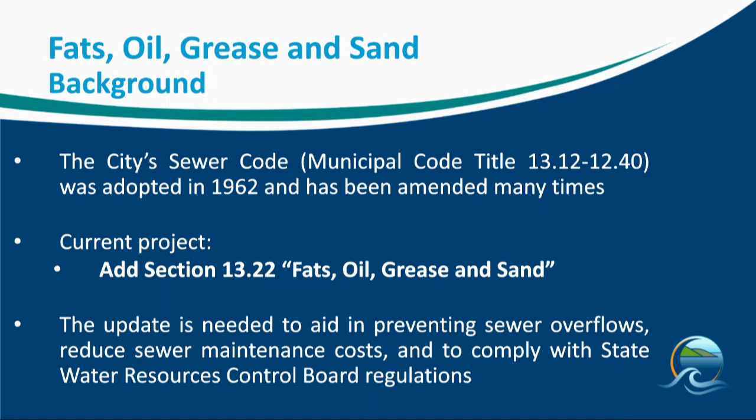Hi, good evening, Madam Mayor, council members. Tonight we have a workshop on fats, oils, grease, and sand, amending the Municipal Code Title 13, Water and Sewer. The city's sewer code was adopted in 1962. It's been amended several times since then. Our current project is to add a section 13.22, fats, oil, grease, and sand. We're proposing this update to help prevent sanitary sewer overflows, to protect public and private property, to reduce sewer system maintenance costs, and to comply with state water board requirements.

So we have an overview of our presentation tonight. We'll be talking about what is FOG, what FOG looks like in the sewer collection system, why we should have a FOG ordinance, who's affected by the FOG ordinance, the prohibitions and regulations of the ordinance, pre-treatment for FOG, and administration of the city's FOG control program.

Can you wait just 1 minute? Our screens, oh, they're fixed. Sorry. Gotcha. Thank you. Okay.

So what is FOG? In the sewer collection system, FOG stands for fats, oils, and grease. And that can come from animal or vegetable sources. It's a long chain carbon and hydrogen molecule. It's a really sticky molecule, and we call them triglycerides. In our sewer collection system, they come in two types. There's the dispersed grease and the floatable grease.

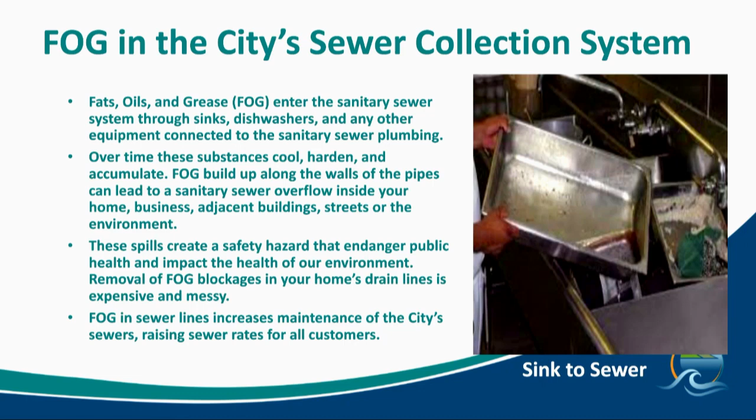So FOG in the collection system can be very expensive. It's very expensive to clean up a sanitary sewer overflow, whether it's on private property or public property. And having FOG in our sewer collection system increases the city's maintenance costs. And those costs get paid through our sewer rates, by our customers.

So what does fog look like in the city's sewer collection system? This center photo here is actually a CCTV photo from one of our pipes. You can see that the fog is collecting along the top of the pipe, because the fats are floating along the top of the effluent. This is kind of the beginning of the problem. It'll start collecting on the pipe, it'll stick to itself, and more and more will collect.

For example, some of this might drop off the pipe and land into the effluent that's flowing. It becomes what we call a fog boat. These globs of fat make their way and sail down the sewer collection system. Here is a photo on the left of two fog boats that were taken out of our collection system, from an 18-inch pipe. They were just about to cause a pretty significant obstruction.

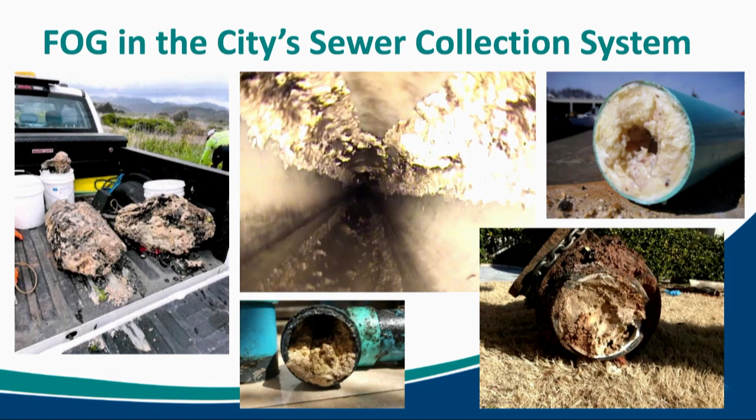So that's fog in the pipes, but we also get fog in our structures in our sewer system. Our pump stations become repositories for fog. The photo on the left is a pump station. Our sewer manholes become full of fog. You can see in the center bottom photo fog in the channel of a sewer manhole. It builds up and collects, and it can actually block the outlet of the manhole, and then you get an overflow out the manhole.

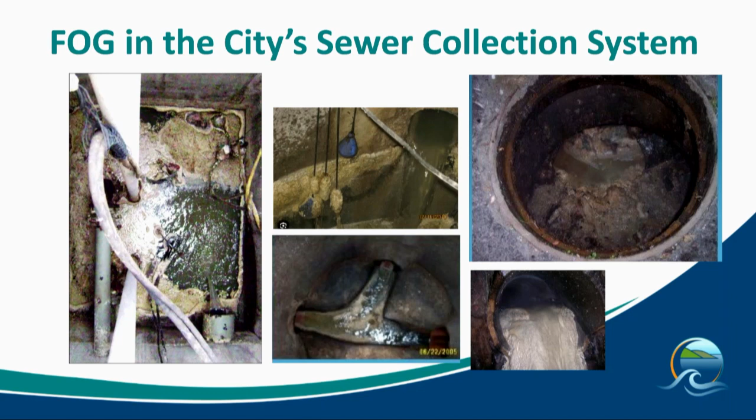So what do those overflows look like? Here's a few sanitary sewer overflows. The one in the right-hand top is on private property. The other two are on municipal lands. One is out in a field, and the other on the left-hand side is an overflow that is pretty significant because it's close to a storm drain. So that is what fog is and what it looks like in our sewer collection system.

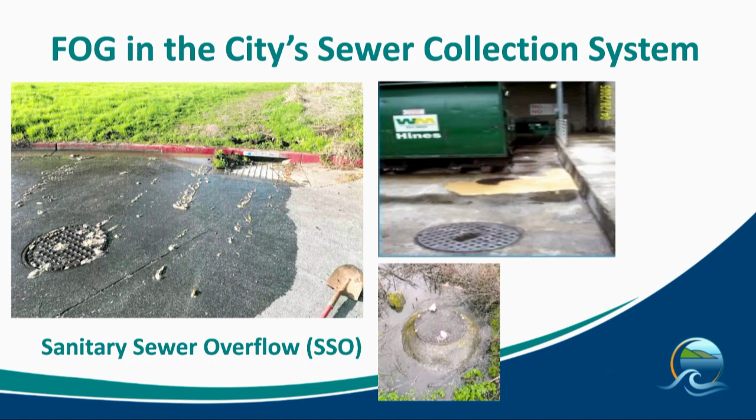I'm wondering if anybody has any questions about fog, dispersed fog. Yeah, really don't want to go too far into that. Okay, so

65% of the sewer overflows nationwide are caused by fog deposits. So in 2006, the State Water Resources Control Board passed an executive order requiring that all wastewater management systems greater than 1 mile in length develop a sewer system management plan and report sanitary sewer overflows. Another requirement is that if there is a problem with fog in the municipal sewer system, the municipality prepare and implement a source control program, a program that addresses the fog at the source.

In conjunction with the executive order from the board, we have the California Plumbing Code, which supports the installation of source controls for the authority having jurisdiction. So why a fog ordinance? Well, certainly we want to reduce blockages and overflows in the sanitary system. We want to reduce maintenance costs. We'd like to protect public and private property and the environment. We would also like to codify our legal authority to enforce these regulations for fog discharge, and through the ordinance make our regulations more clear so that folks can understand the requirements of fog management.

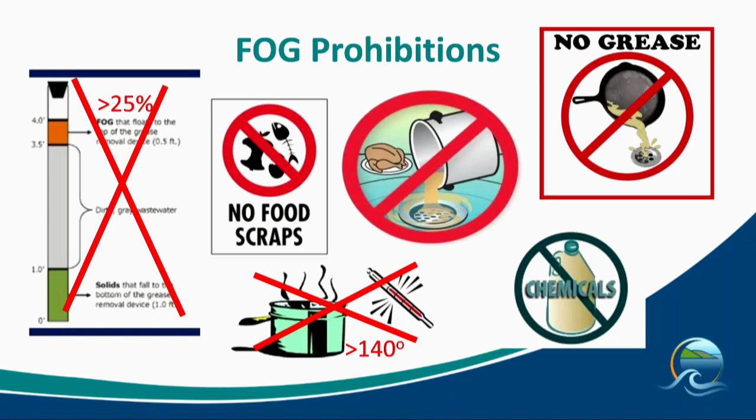I would also add, these are good little BMPs, best management practices for your own kitchen. Maybe not for the sanitary sewer system, but for your laterals. So definitely good information in general. Yeah, and the limited food service establishments should follow these. You know, you should wipe your pots and pans before you put them in the sink. Wipe out with a towel or with a paper towel. Clean your cooking utensils and equipment before you put them in the sink.

So those are the prohibitions, and the ordinance also establishes some regulations, and those are best management practices for the kitchen facilities, pre-treatment of the effluent, and establishing the FOG waste discharge permit.

So what are some best management practices? It's basically wipe down your dishware before you put it in the sink or in the dishwasher to clean. Wipe down your food storage containers. Wipe down your serving ware, your cooking ware, your pots and pans. Wipe them all down before you put them in the sink. In the sink, have a food strainer so that no foods go down the drain that carry fats with them.

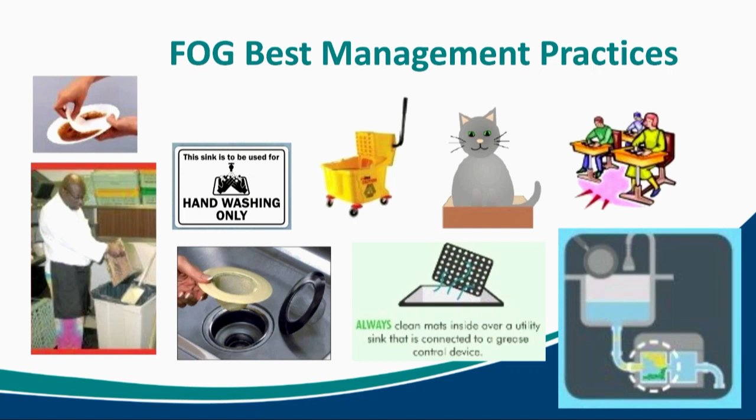If you do have a spill in your facility of fats, clean them up using a spill kit that might have like cat litter in it that'll absorb the oil, and then you can just throw it away in the garbage can. Be sure and teach your employees all of these management practices so that you know that your employees are helping you comply with the ordinance.

And another best management practice tool is pre-treatment of the effluent before the effluent reaches the city's sanitary sewer system. So pre-treatment is typically in the form of grease control devices. There are a number of different kinds. There's grease interceptors, which are usually larger units, and they're installed underground, typically outdoors, outside the building. And then there's these smaller grease traps, which are installed in the kitchen itself. These grease traps are connected to the kitchen equipment, and they can be installed under the floor, or above the floor level.

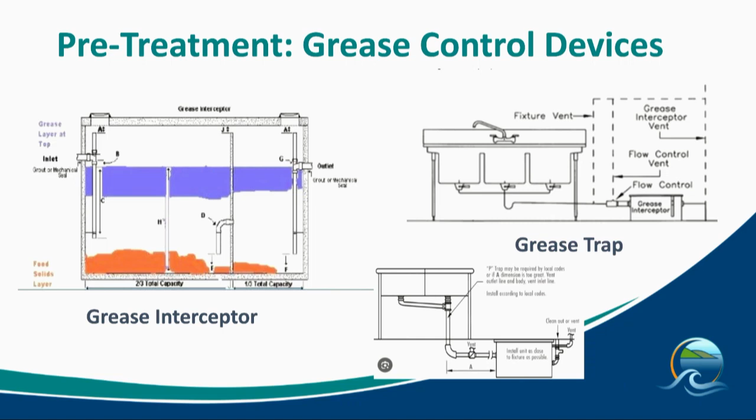So the larger grease interceptors, this is kind of what they look like. This example is a 1,000-gallon grease interceptor. You can kind of see the scale there. It's on the truck. Those are like 4 by 4 by 8 feet long. And you dig a hole, you put them in the ground there, and you connect your plumbing up to it. The only plumbing that can be connected to this is your grease-laden plumbing.

You can't connect any toilet water, or shower water; that doesn't go through this interceptor. This is just for your kitchen equipment. Here's an example of an interceptor that's been installed in concrete. And then over here, we have an example of an interceptor that was installed in a landscape strip.

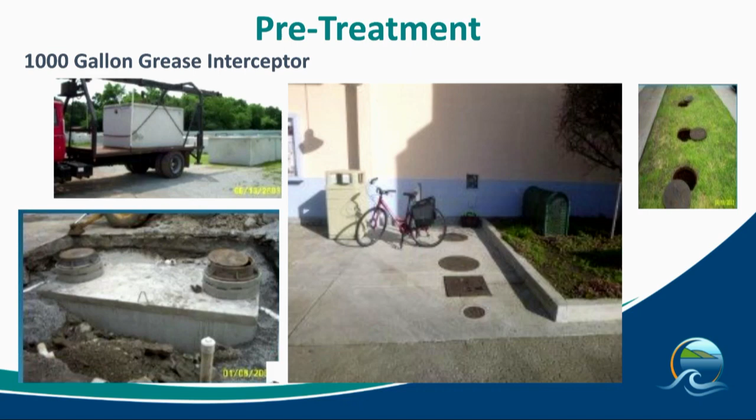So other pretreatment is the grease traps, and we got some photos here of some above-floor grease traps. You can see them there connected to the sinks. This one's right underneath the sink. This one is a little bit more complicated plumbing. And then the larger one, that's a grease trap under this sink, but it's been installed under the floor. And here's another grease trap that is installed under the floor.

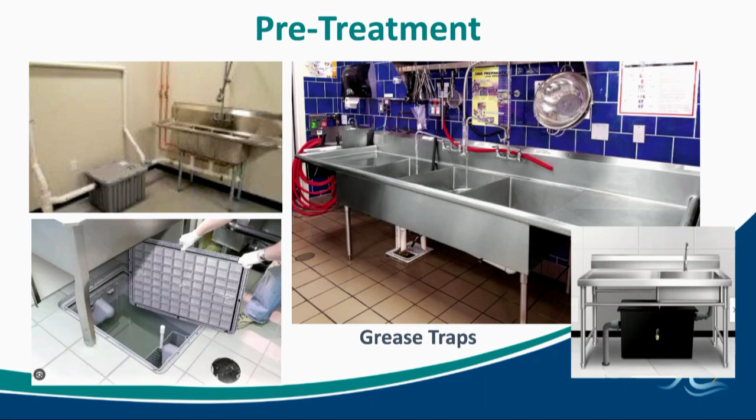So what we haven't talked about is yellow grease, yet another grease. Yellow grease is cooking oil that's used in these deep fryers, and they put them on the griddle. It's cooking oil, and because this equipment isn't hooked up to the sewer or the interceptors, this equipment you usually clean by hand. And so they'll put these in containers and store them in approved containers, usually outside the building.

We encourage that because there are more and more opportunities to recycle these fats and oils, and so we encourage this pickup by waste haulers. And then auto repair shops, just real quick, they also have used oil, and they're part of the program. Our inspectors go and make sure that they're putting their oil in these approved containers outside their building, and that they have a waste hauler that comes and takes the oil and disposes of it properly.

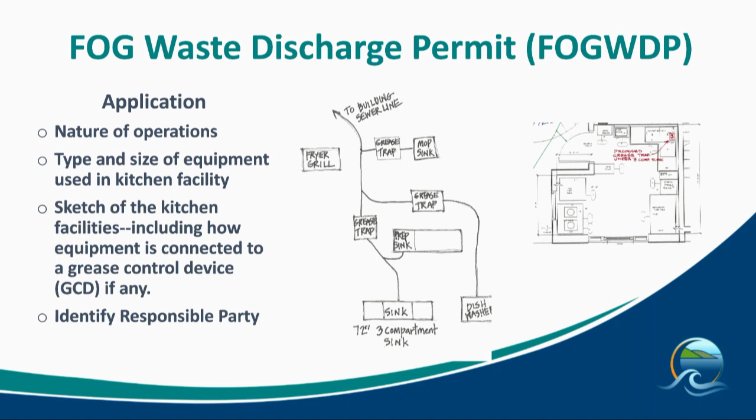So it could be a hand sketch, or if it's a newer facility and they happen to have the plans, like tenant improvement plans, that's great, then we can just look at their plans. But some of these dischargers have been doing this for years, and we don't even have a map of their kitchen. So they could make a sketch by hand, and it could be just as simple as this. We just want to know where their sinks are and if they have a grease trap or not. The application will also identify the responsible party who our inspectors should contact when they come on site to do inspections.

So the city has, in our master fee schedule, a FOG certification fee. It's currently $55, and we've never used it because we've never had a program to implement the fee, but it is in the master fee schedule. In 22-23, our FOG inspection costs: we had 86 facilities that we inspected. We had to come back and do some follow-ups. We had about a 10% non-compliance rate, and so there were some follow-ups, with a total inspection cost for that year of about $32,000. So the average inspection fee was about $370 a year.

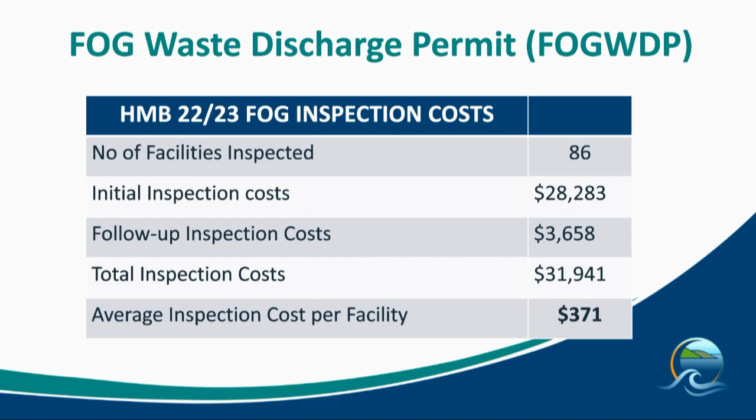We looked around at some of the cities in San Mateo. It wasn't an extensive search, but we looked at some of the cities in the county. Most of the cities that have a FOG program do charge an annual fee. Listed here are the annual fees that are charged by these cities. All of the information on the websites explains that these fees don't really cover their actual costs either.

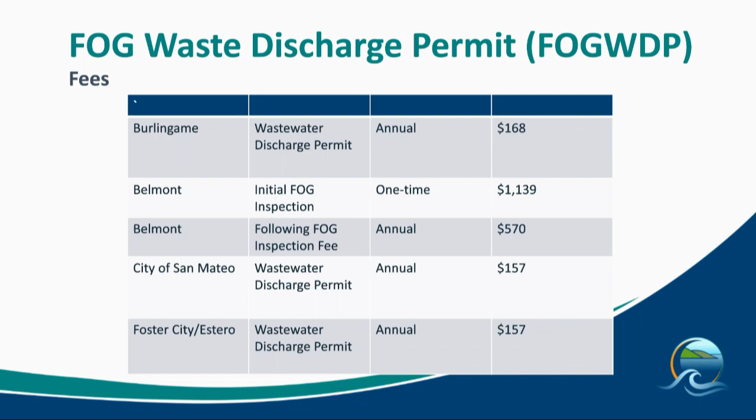And then we see that Belmont has an inspection fee as well for their initial inspection, in addition to the annual inspection fees. It's interesting that Belmont chose to do that, but I think I can understand, because that first initial inspection and the rollout of the permit is a little bit more laborious than ongoing annual inspections.

And so what are the inspections? So here in this top row series is an inspection of an underfloor mounted grease trap. And then we have a grease trap that's under the sink here above the floor. And here on the left is inspection of an interceptor.

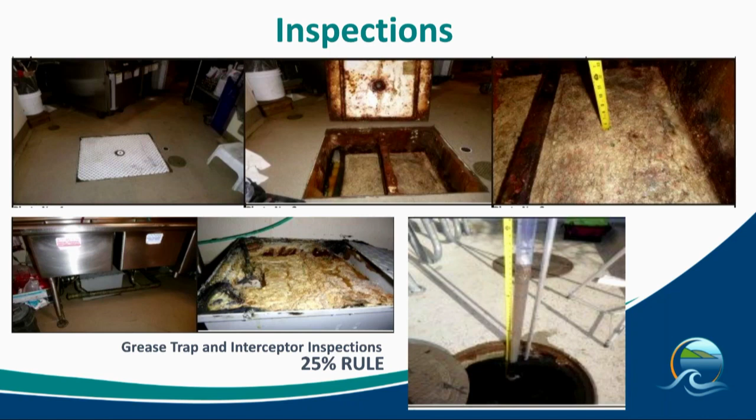Now, what they're looking for is what we call the 25% rule. When we looked at that interceptor diagram earlier, we saw the fats at the top and the solids at the bottom. You want to add that up: the depth of the solids and the depth of the fat can't be more than 25% of the total depth. So that's why it's got this measuring tape here, and even the inspections are lengthy, the annual inspections.

What else do they look for in the inspections? Well, they're annual inspections, so the facilities are required to keep records of what they've done for the year. The facilities are required to keep a record of their cleaning schedule, name the person who cleaned the trap, identify the quantity of grease that was removed from these grease capture devices, and importantly, where they ultimately disposed of the grease that they removed from the capture devices.

They need to provide their waste hauler records. This is one of the things that we look at at the auto shops, to make sure that they're properly ultimately disposing of the grease that they've been storing in those bins.

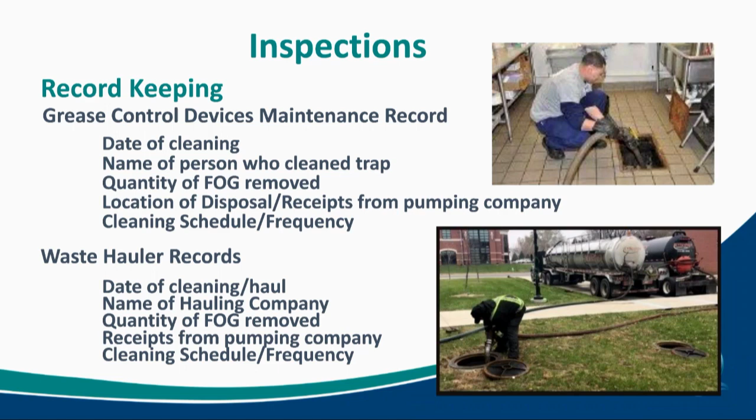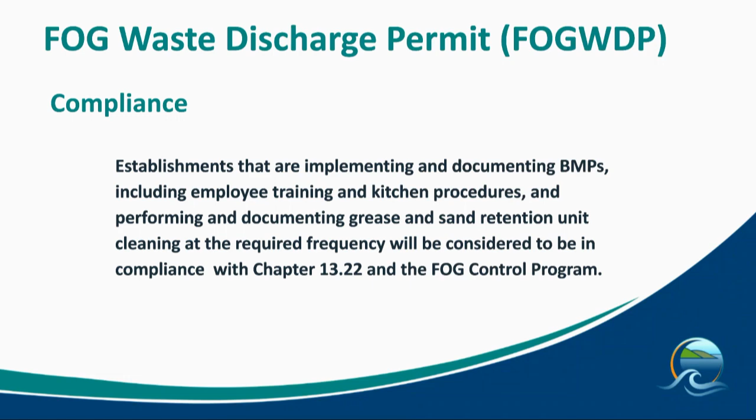So what is the measure of compliance for these facilities? It's basically do all the things that we just said. You do your best management practices, clean your grease trap, keep a record of your cleaning, dispose of your grease properly, train your employees to be mindful about handling grease and oils that could enter our system. So we do look at those records in our inspections.

So with a violation, let's say the inspector gets there and the trap looks fine, but they have no records. What have they been doing this last year? That would be a violation. They haven't kept records. If the inspector gets there and the grease trap is full and overflowing, that would be a violation. So the first violation is a written notice of noncompliance, and the facility has 15 days to make a correction. Second notice is 10 days to make that correction, and third strike, the issue goes to code compliance, which is handled under Title IV of our municipal code.

There's also a remedial repair and abatement section, also handled by Title IV, whereby owners of food service establishments that contributed to an SSO are required to reimburse the city for the cost of abatement and repair. If I may just add, if we get to that code enforcement item, then there is an administrative fine that could be levied against a business for noncompliance. It's about $1,000, I want to say. I'm not sure. I think it's $1,000 per violation, through Title IV.

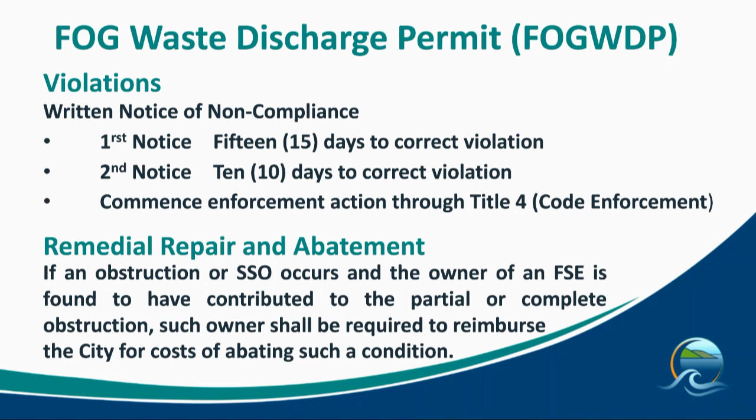So again, a copy of the ordinance is on our website. Our next steps are to continue our public education and outreach. Then the more formal steps would be to schedule a first and second reading of the ordinance, ordinance implementation, and then ongoing support for our businesses. Are there any questions? Yes, please.

I'm not sure what this would look like, but I was wondering if there's any consideration to build some incentives for folks who keep less than 25% of gunk in their units. So maybe, you know what I mean, I don't know exactly the ratio, but if it's exemplary, a 25% decrease maybe in their fee.

I think we can certainly look at that. I know that there have been opportunities where businesses have been doing really well, and they've asked for a reduced number of inspections. So that's one thing where we can reduce the frequency, maybe not annual, and maybe we go to a different rate of inspection. So there's definitely opportunities there, and that's something that we'll look at as far as our administrative policy that would go hand in hand with our ordinance.